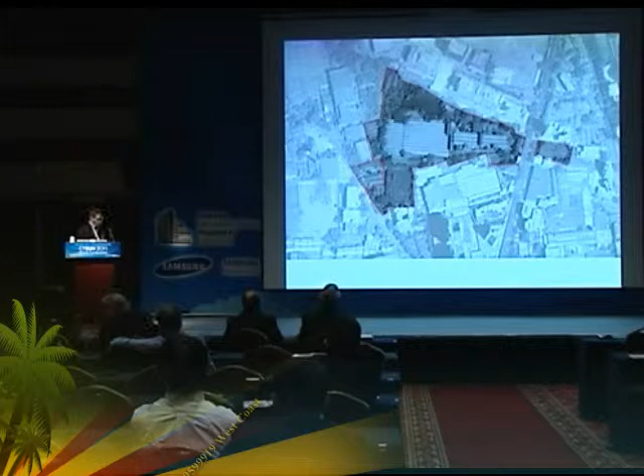And we talked with our client about how to approach this issue and essentially said, well, this is a very good location, but it's not a place. And with our interest of contributing to the life of the city and also utilizing the site quite efficiently and making the most real estate value for them, we actually made one very important move, which was to strike a road or a street or a boulevard

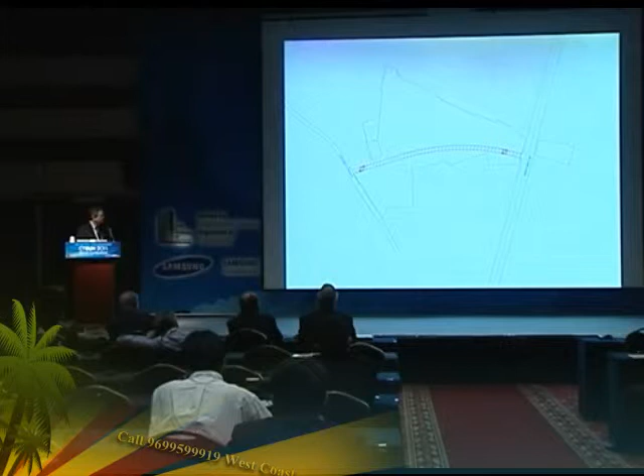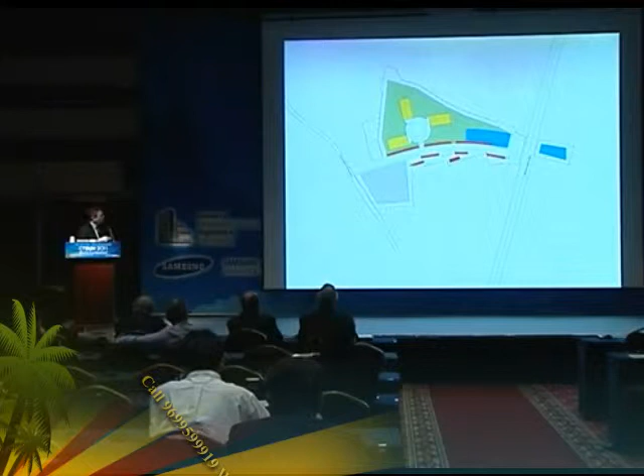across the site and to say that this is the place, this is the location, this is actually the identity of the place. What that also does is divide the site very cleanly and very effectively into a zone which can have public uses, parks, retail, street life, active street frontage, and still maintain quite a bit of space necessary for the actual mixed-use development itself.

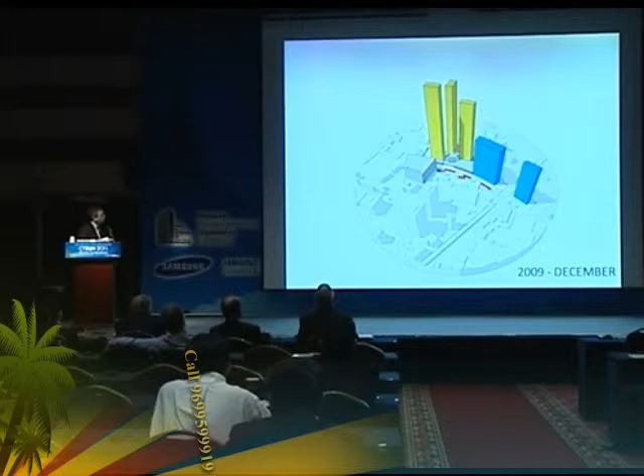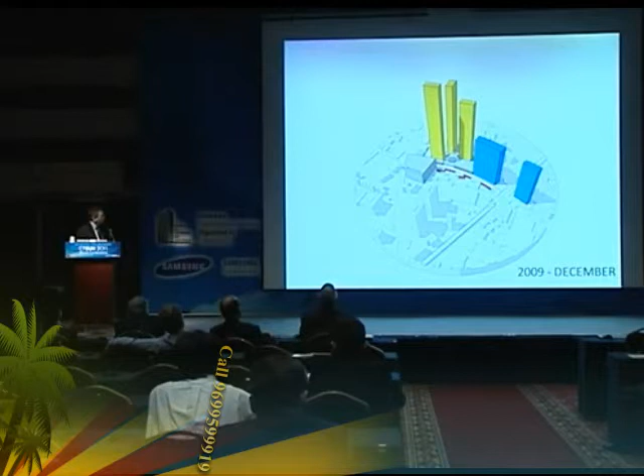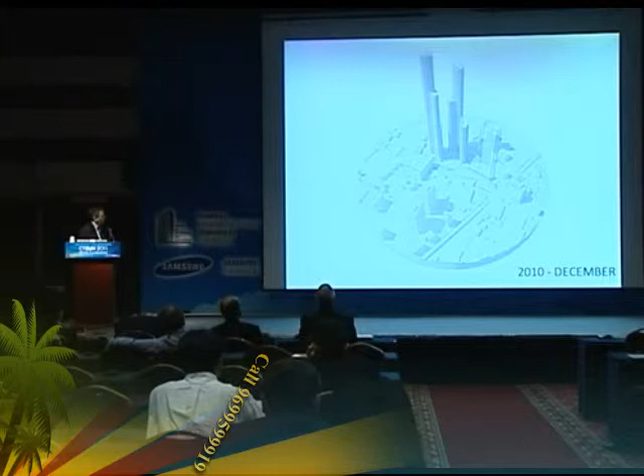And the master plan, as it sort of completed its initial stage, with the designation of 3 already quite tall residential buildings, a group in yellow, mixed-use buildings in blue, the red indicating retail and street uses, and the green indicating public park. Fast forward about a year of design into a variety of buildings, and we still have the beginning of the development of a street life which connects the whole complex to the city,

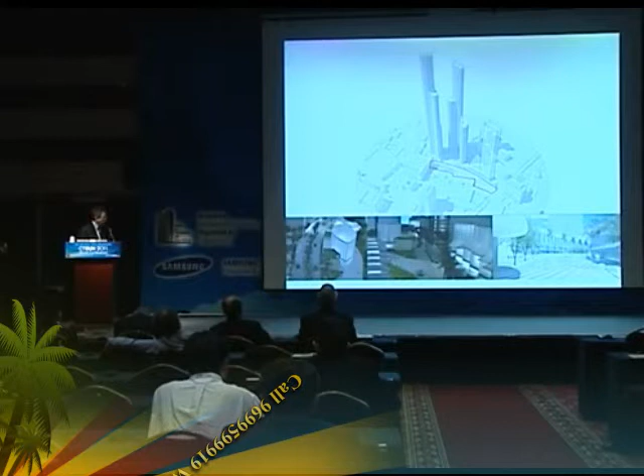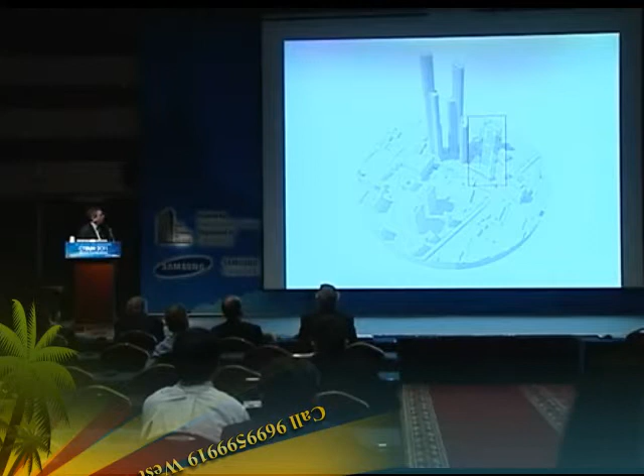a boutique office building about 250,000 square feet, a mixed-use tower which is currently in schematic design, and of course a group of residential buildings, residential towers, the tallest of which is World 1, which is primarily the subject of the presentation. But it's important from my point of view to go through how the site works and how, in particular, the density of the site required a response that couldn't start with the tall, iconic building that the client wanted to build. That had to relate to something.

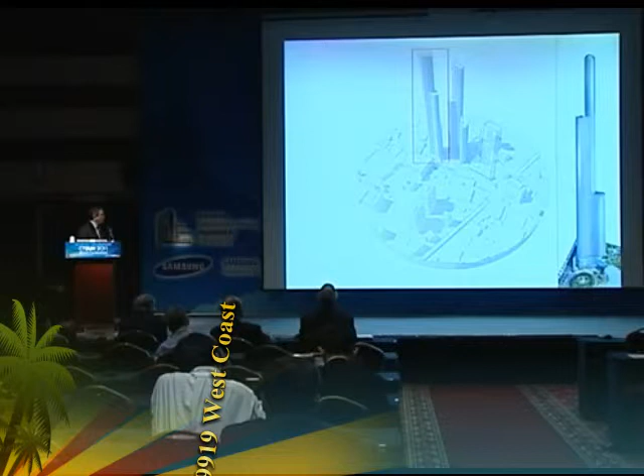So how did it get to be the way it looks, and what you're seeing in the three-dimensional image is more or less the final design which is under construction. And it's interesting, I think, in the context of Adrian Smith's comments this morning about his interest in the three-leg plan and the sort of lineage through architecture. We didn't start here. We didn't quite back into it, but it was more the confluence of a very dense site which needed to accommodate a whole lot of apartments in conjunction with structure and other kinds of considerations.

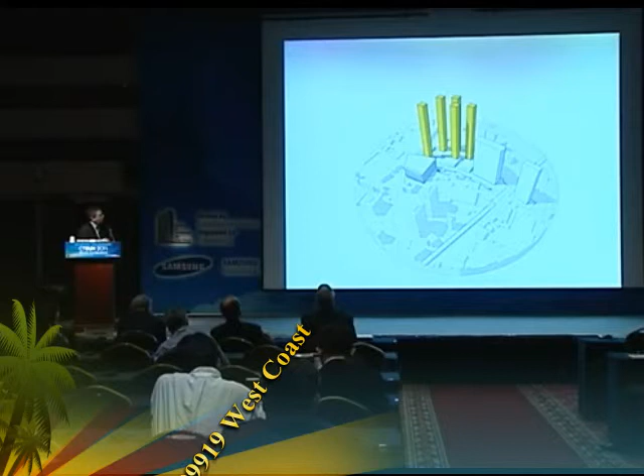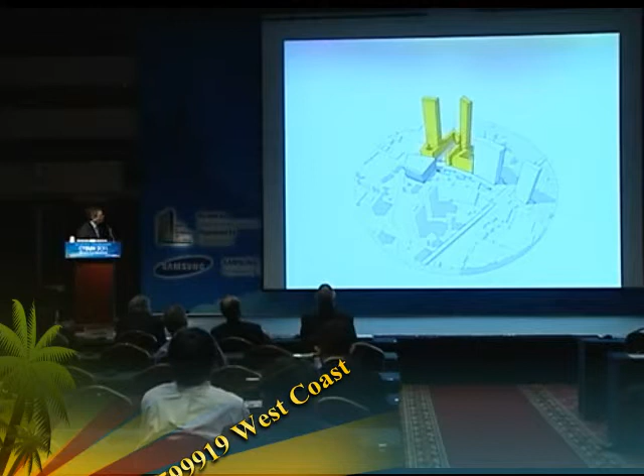Along the way to finding our way to that solution to the residential development in these towers, of course, we looked at different typologies, a typical 90-foot square point tower. We looked at mid-rise, which really wasn't so mid-rise because of the sheer amount of housing that was trying to be put on the site. We looked at mixtures of high and mid-rise, but essentially came back to the answer I think we always knew, which would be that this would be a group of tall towers. Already at this point, also indicating that there was one special and dominant tower among the family of three.

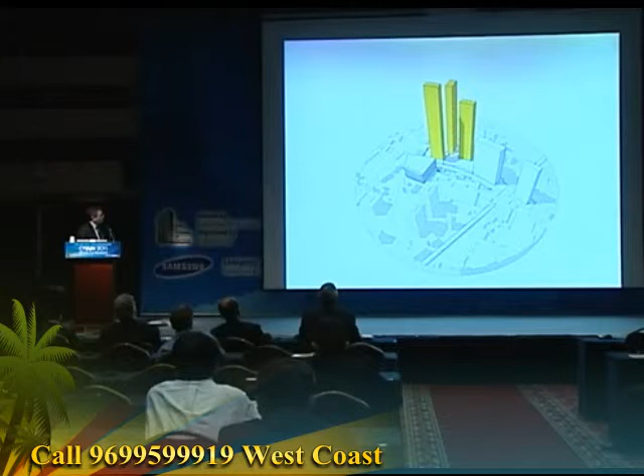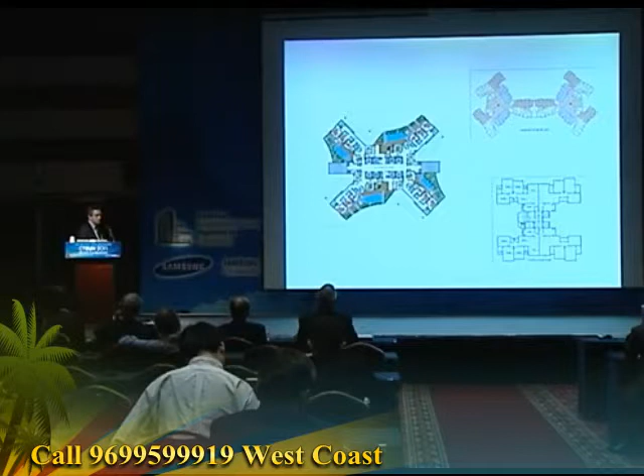Now, to take this diagram, which is a bit generic, and turn it into what it needed to be in the context of Mumbai, we spent a good deal of time looking at some local precedents. These are floor plans from a variety of typical high-rise buildings in Mumbai from the early to mid-2000s, from which we drew a few early conclusions. One was that almost all these buildings were the logical maximum extrusion of lower building typologies. Single groups of elevator banks, no high-rise and low-rise, building aspect ratios, in this one in particular, which couldn't really be extruded any further.

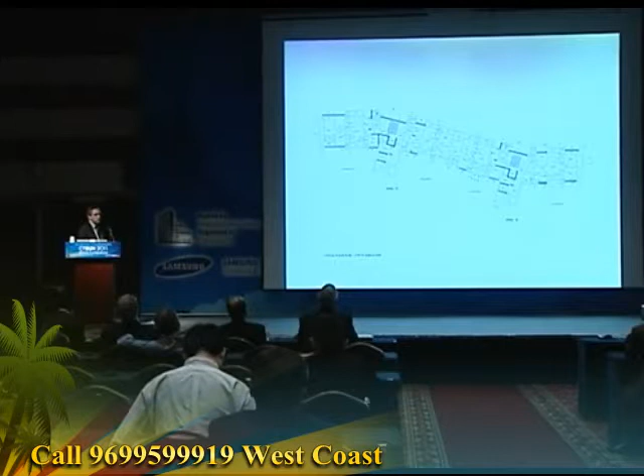We also found, by and large, and this is not a surprise in terms of buildings that are 100% residential usage, that the buildings are designed almost entirely from the inside out. And so there were a lot of aspects of this, knowing the density and the height that we were going to achieve, but also the aspirations of building an iconic building on part of our client, that we knew could not apply to what we were doing.

And so we had to begin to make a sort of new typology within this context, which certainly wouldn't be the kind of typology you would find somewhere else in the world, but also wasn't what you already found here in Mumbai. But at the same time as we knew that we had to make improvements, we also knew that this inside-out design approach and our clients and their competition's very clear sense of the residential market meant that we had to look at these quite closely, and that we had to find a number of ways of achieving things that are actually quite desirable about these buildings.

Many of them have floor-through units. Many of them have extensive balconies. They're actually, in many cases, quite large units. And so we took these typologies and began to make our own sort of prototype. Generic in terms of what it predicted as architecture, but embodying a number of aspects that we thought would have to carry all the way through.

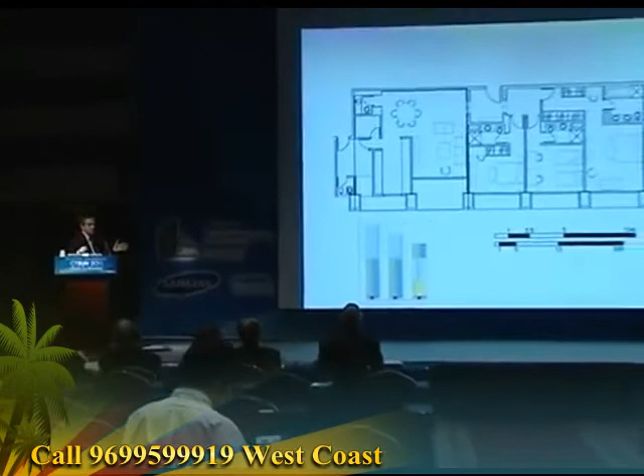The size of the apartment is extremely important. There was a very small range in which the apartments could be judged to be marketable, meaning they had to be at just the right size, just big enough, but not too big to fit certain area ranges.

The buildings that we looked at as precedents almost entirely had bathrooms that were at the exterior, which is fairly typical in Mumbai. Because of the density on the site, we knew we couldn't waste space on the outside, and so we made an early decision that they would be interior, which is not a huge breakthrough, but it is different from what was the norm. These are high-end apartments, and our client wanted balconies in every single room.

Relationships between family and public space, servant space, service, all had to be respected. In most of the super tall buildings we look at, we find a mixture of uses, and that's the way in which shape and appearance begins to be changed from bottom to top. In this case, we had very discrete building elements, and we also had a circumstance in which a taut curtain wall, for instance, was not going to be the solution.

We also knew, and this is sort of the key that started us into actually finding a suitable building form, that these diagrams at the bottom are actually Excel charts, and the pro forma was such that when we started to deploy this on the site, it became clear rather quickly that we needed 6 units per floor at the bottom of at least 2 of these 3 buildings. And so, knowing the size of the units and that we needed 6 of them, we knew we needed 21 bedrooms, 6 living rooms, 6 kitchens and service areas per floor.

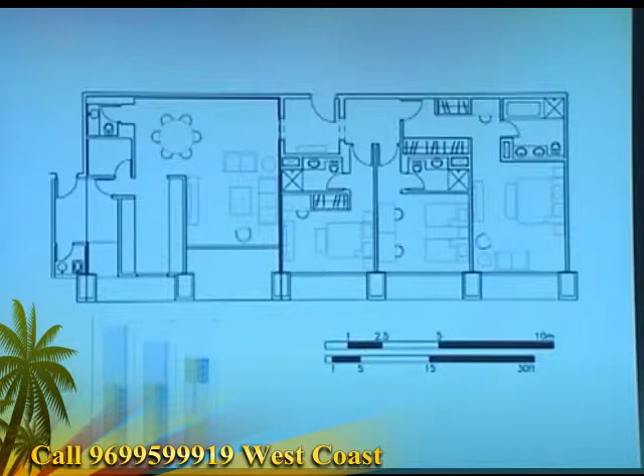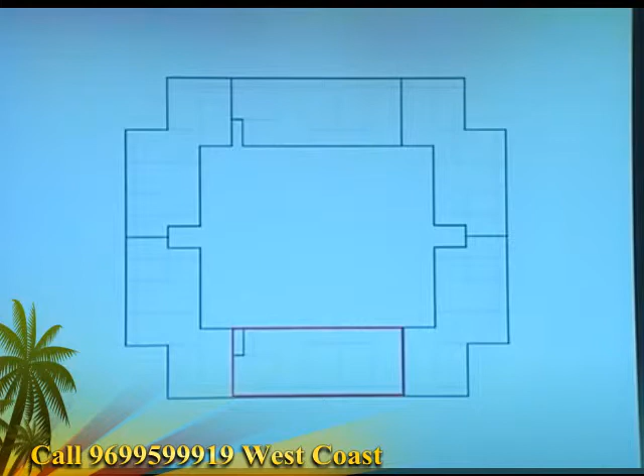And we started to do a kind of calculus where we take that prototype unit in red, start to imagine how cores might work, and they didn't want more than 2 apartments entered from 1 set of elevators, an additional complication. We started to do a kind of calculus of, well, if we need that much perimeter and we have to figure out a logical core, what are we going to do? And of course, that's how, between site and program, we ended up with our 3-leg plan, with an idea that structurally this would also have advantages as we moved forward.

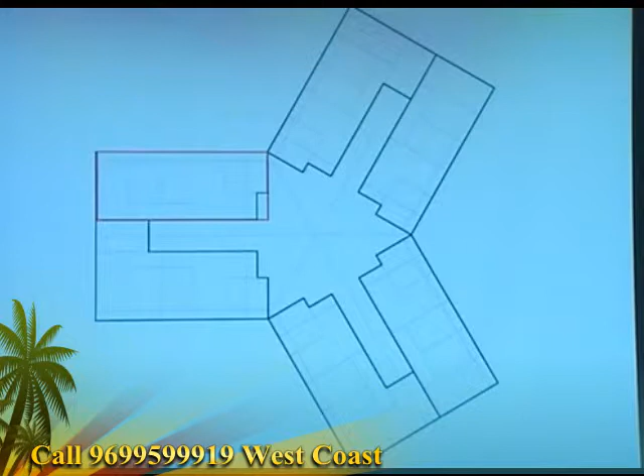And so you can see as we begin to take that diagram and start to put the shape in it that you saw in the building itself. And so we had a scheme, let's say, at least for the plan of the building and the basic volumetrics of the building, but we didn't have a structural scheme yet.

We made the early proposition architecturally that a cage of closely spaced columns at the perimeter with proper connections to the interior was a likely approach to deal with lateral forces and to be consistent with what we needed to do in terms of residential plans. And of course, the strength of concrete normally used in a place like Mumbai isn't particularly high, and those columns at the bottom of the building were quite big.

We looked at embedding steel in the columns, which had a very marginal reduction in the size of the columns, and fairly quickly rejected that as an approach for its complexity in construction.

But during this time, we also had essentially quite refined the actual unit plans, to a degree that we were quite happy with them, and our client was happy with them, in terms of all bedrooms essentially having full-length windows and balconies at their edges, and the sort of payoff of a shape like this, which was that the living rooms and dining areas were at the perimeter.

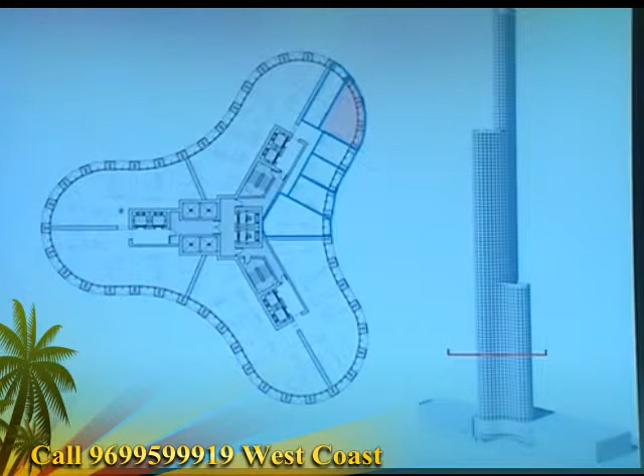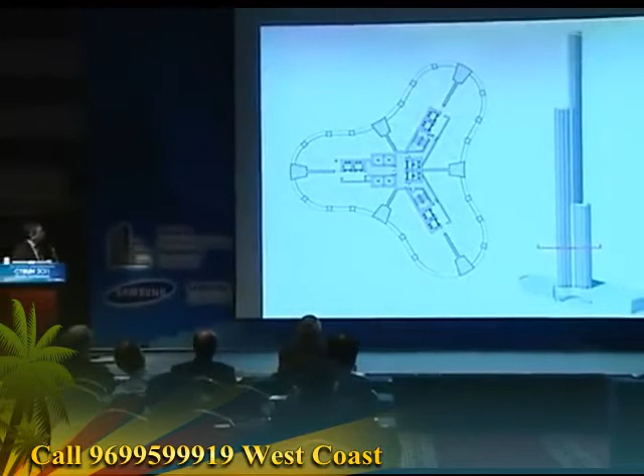Now, of course, none of us liked the 2 giant columns that were in that living room, and so to this point, we told our structural engineer that they were being too polite and too cautious with us and sort of taking our lead. And I said, you know, forget everything you know about this except the shape of the building and the volumetrics, and what would the perfect structure be.

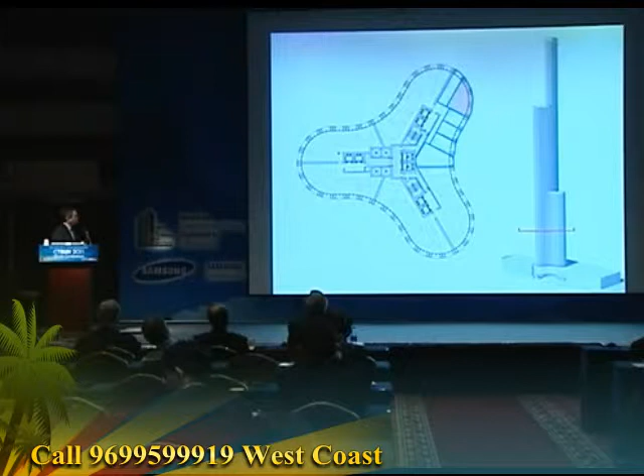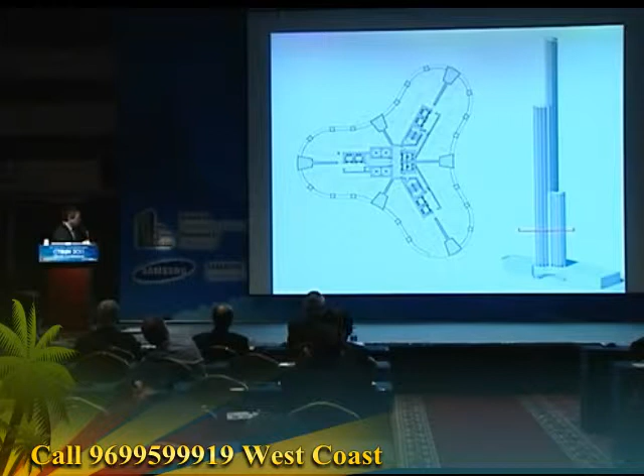And we sort of had a sense of what the answer might be, and of course it was 6 mega columns, and Bill can describe this better than I can, 6 mega columns connected to the core in a strategic fashion. But of course, given the calculus that I talked about before in terms of needing a certain amount of perimeter, this was effectively taking 6 bedrooms out of the mix, and so the building didn't work anymore.

And we played with that further, for instance, to say, well, maybe we could configure it a little bit differently. But those are still actually quite large, and we were losing floor area in a place where we couldn't afford to lose floor area relative to residential plans. And so, given these and what we were working with, and you've also seen this evolving in 3 dimensions as I've shown the plan, we started talking about a hybrid system and what the possibilities would be.

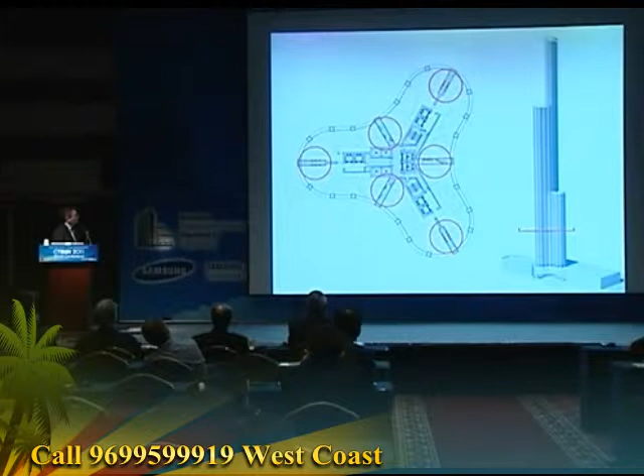And of course, I should have said that, done that slide. I'll go past that.

So what we ended up with as an approach that works very well for structure and very well for the apartments is actually a sort of hybrid megastructure in which we gathered 6 columns in the concave surfaces and gathered 3 in the convex surfaces, and we're able to open this area up with a single small gravity column which gets taken out at each tier.

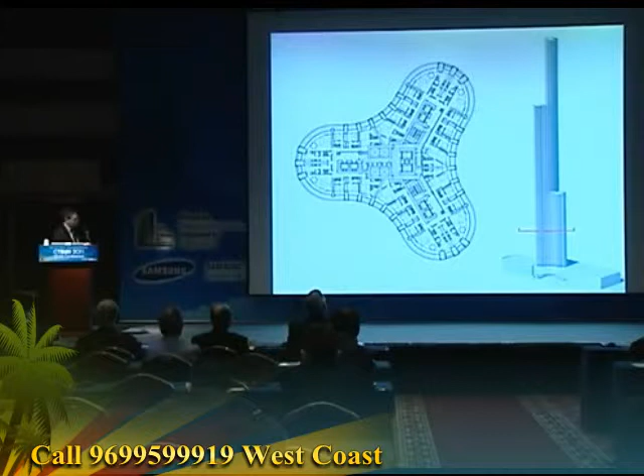The result of that visually for us was quite exciting and quite important, in that the gathering of the columns, 6 columns in the concave, leaves one column, the single visual element, which goes from top to bottom in each tier at the inflection point.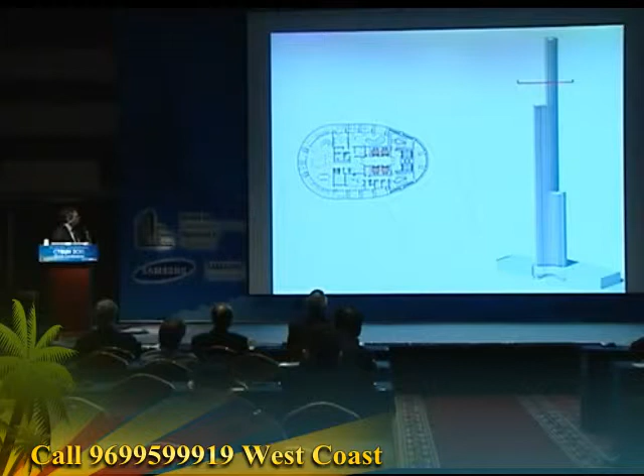Tier 2 plan working with the hybrid structure, and Tier 3 in which there are duplex apartments occupying the entire floor plate. And some images of the building where you can see the effect of the gathered columns, the stretch, and the columns at the end. In a way, they energize and enliven the form in a way that our initial ideas couldn't do. A few more images quickly.

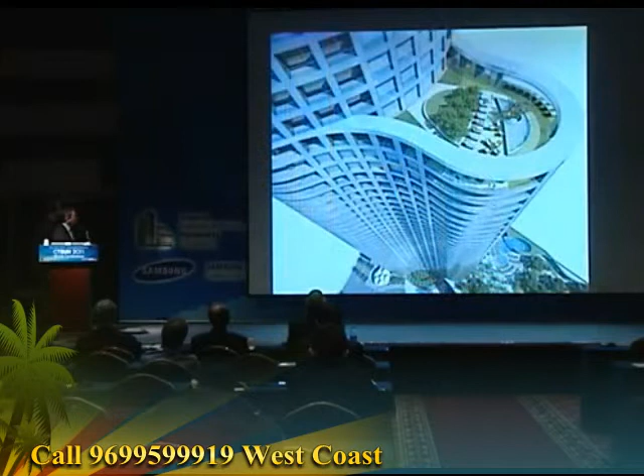And several views inside and out showing how the living rooms and bedrooms work relative to structure. At the living rooms in the lowest tier, the second tier with larger apartments and a living dining area with a panoramic view, and then at the very top of the building there are, I think, a dozen of these duplex units where the payoff of the structural configuration is especially welcome. And on the skyline, and now for real substance.

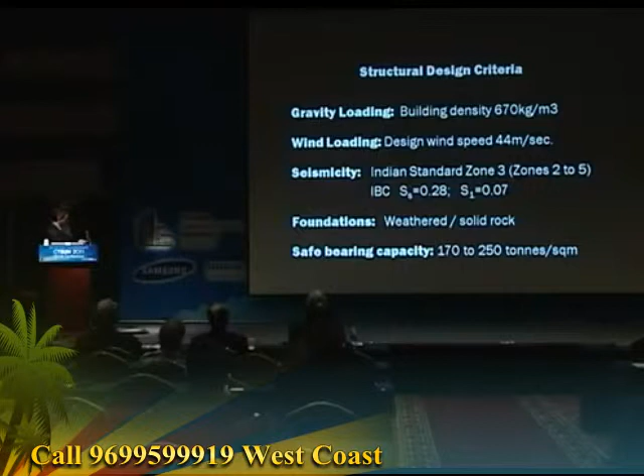I don't know, I thought that was a lot of substance.

Well, Jay has made the premise to you that together we've created a building that works well from an architectural perspective, from a structural perspective, and is well integrated. I think in the last slides he showed you, in some sense the architecture speaks for itself, of course, but let's look and see how well we did.

So this is just some basic data that particularly the structural engineers out there can sink your teeth into. The first line basically tells you that in Mumbai, for a variety of reasons, buildings are quite heavy. So you have a really dense, heavy building to start with. Wind loads are pretty comparable to here, maybe a little windier than here in Seoul; New York, very comparable. I would say that the speeds that are listed are, by some opinions, conservative.

Seismicity is moderate. It's in the middle of the range of the Indian spectrum. And in IBC terms, for those of you who would speak that, you have some data there in terms of IBC. It's more or less, again, comparable to New York, I would say.

In terms of foundations, Mumbai is a mixed bag. It's former islands filled in, so depending on where you are, you have different conditions. But generally, if you go deep enough, you hit really good rock. So we had a combination of weathered rock and then solid rock down maybe 30 meters.

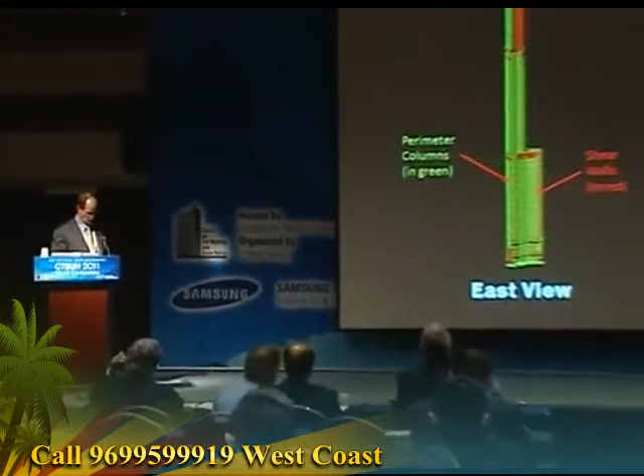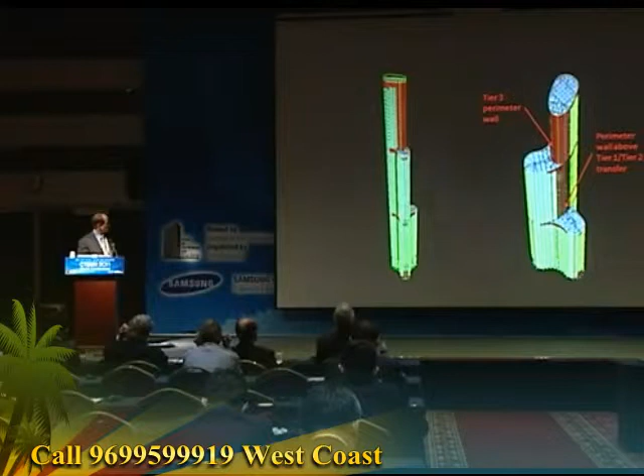In terms of the structural system, some of the images Jay showed you give you a pretty good idea. Here's a few more. Obviously, the grouped perimeter columns. You see some shear walls, which are sort of along the splines, like some of the other buildings you've seen today. Additionally, there are some walls on the perimeter that overlie where the one tier sets back below, on the tier below. Not as well organized as some other buildings, but still a system that allows us to deal with the stresses that occur at those intersections.

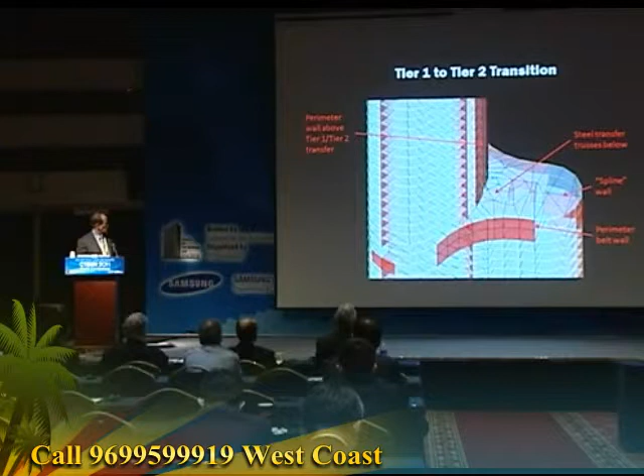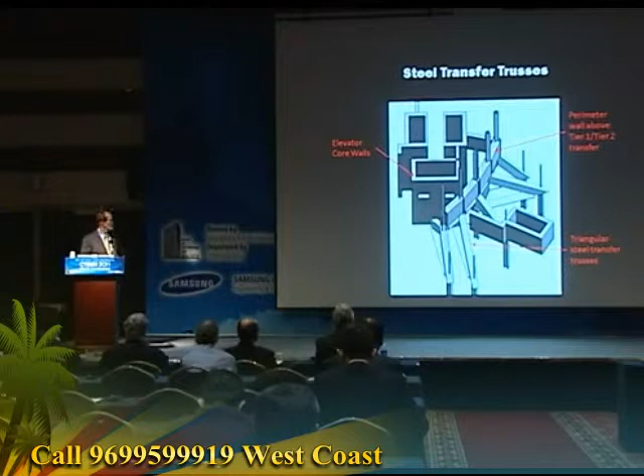Here's the more difficult one, the Tier 2 sitting on Tier 1, and we'll just go inside a little bit because the wall that goes across the top of Tier 1 is transferred out by a series of simple 3-piece trusses, steel trusses. We try to use as little steel as possible in the Mumbai market. It's seen as a significant premium as well as something that the local contractors at least do not have a lot of good experience with.

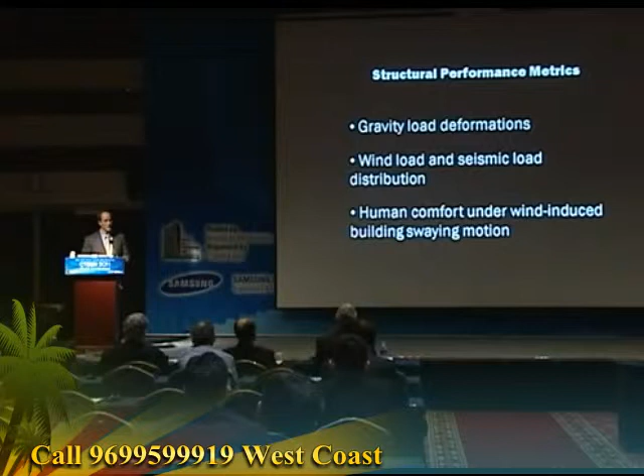In terms of the metrics for how we did, I thought these were some of the more important ones. In a tall building, as others have said today, obviously keeping the differential shortening of the individual columns and walls to a minimum is an important consideration, dealing, of course, with the wind and seismic loads, and then achieving the requisite level of human comfort in the wind.

In terms of the dead load distribution, you can probably see from this chart that the bubbles represent the general magnitude of the load at different places in the footprint. This is at the foundation level. Obviously, you have 3 tiers, which are at different heights, so much greater loads. But hopefully you can see from this diagram that the distribution is relatively even. Obviously one side is more heavily loaded than the other, but the distribution of the load is pretty good. If I just back up a second, if I can figure out how to do that. In terms of the magnitude of the load, the most heavily loaded column under gravity is 136,000 kilonewtons. It will be a reference point for these other slides.

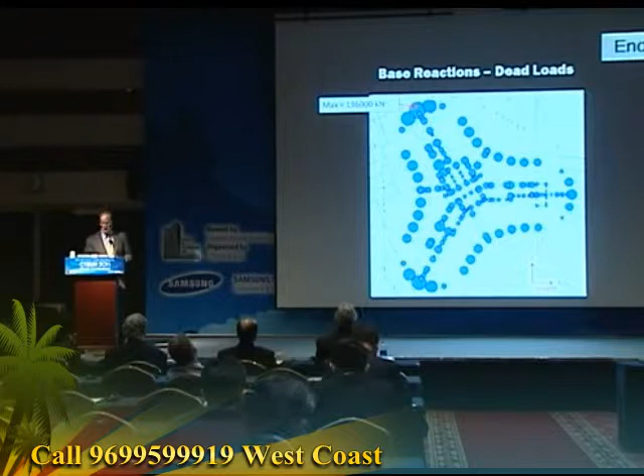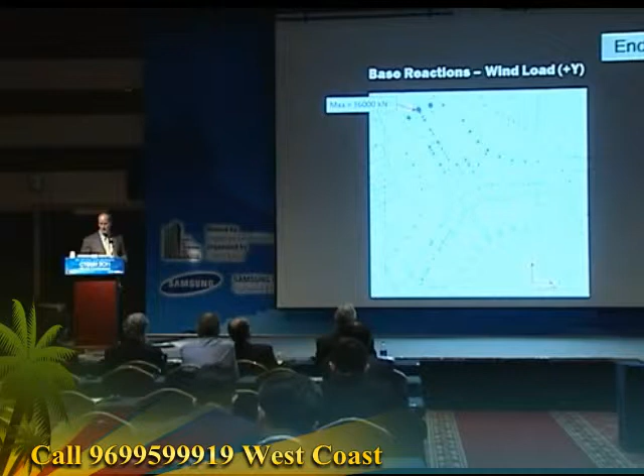Now, if we look at the wind, you see a pattern which represents that the whole of the building is acting together. You see the peak stresses, the blue, the largest compressive stress due to wind, and the white circles, the largest tensile stresses due to wind alone, are at the perimeter, and there's again a relatively gradual distribution between the perimeter and the middle and to the other side. The magnitude of the wind load is now 36,000 compared to the 136,000 you saw on the prior slide. So the wind loads are large, but there's no tension at the bottom of the building. Same thing, different wind direction, same sort of conclusions.

In terms of seismic, another point of reference in terms of the numbers, 24,000 kilonewtons. So as with some of the other buildings shown here, in a moderate seismic zone, the wind load is basically double the seismic excitation.

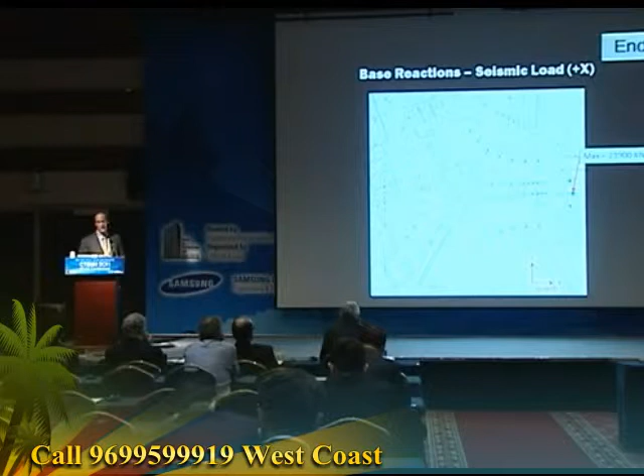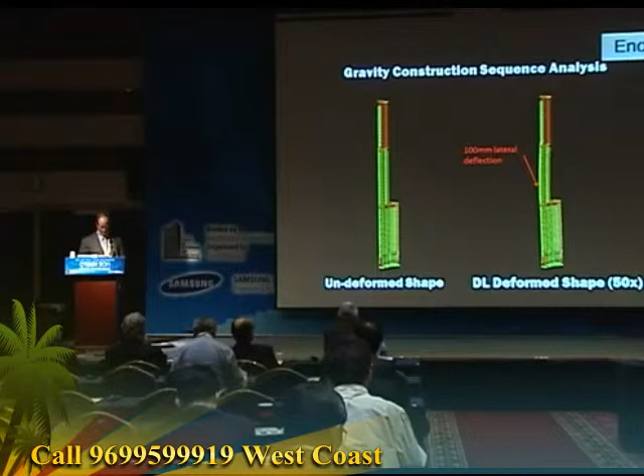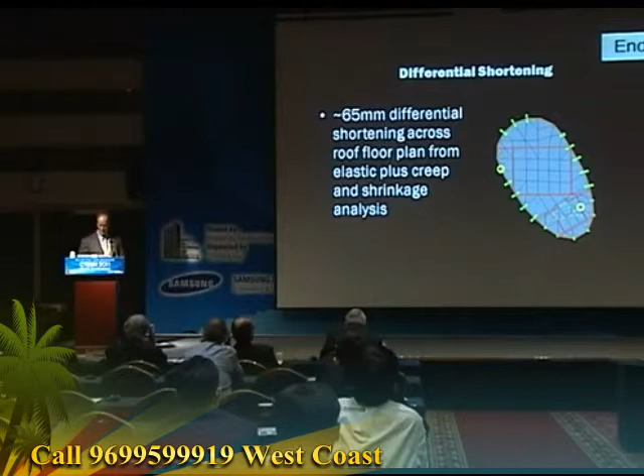In terms of the deformations of the building under its own weight, these are the results of a construction sequence analysis where, as is typical, you generally get the largest degree of lean associated with differential effects more or less partway up the building. 100 millimeters is not a bad value in my opinion. In terms of differential shortening between individual columns, if you go to the roof and look at the relative values, the greatest difference is between the 2 points circled, which are a significant distance apart, and the differential, including all long-term effects, is 65 millimeters. So again, I think a quite acceptable result.

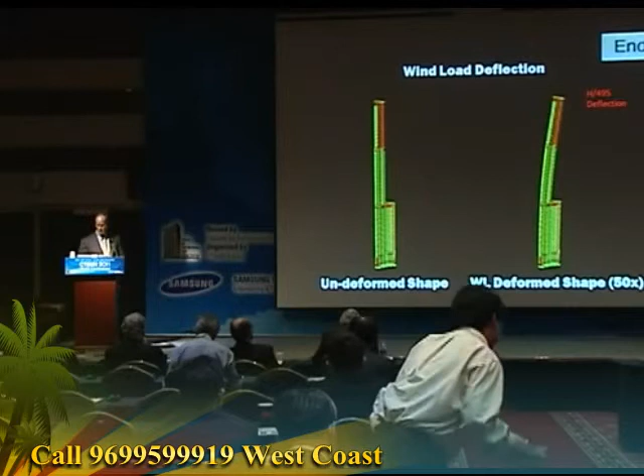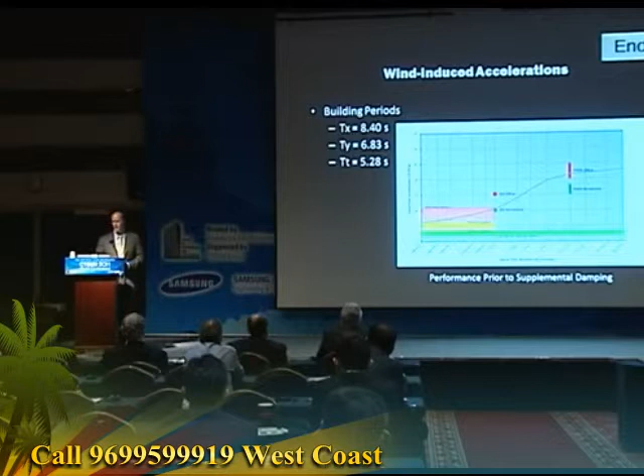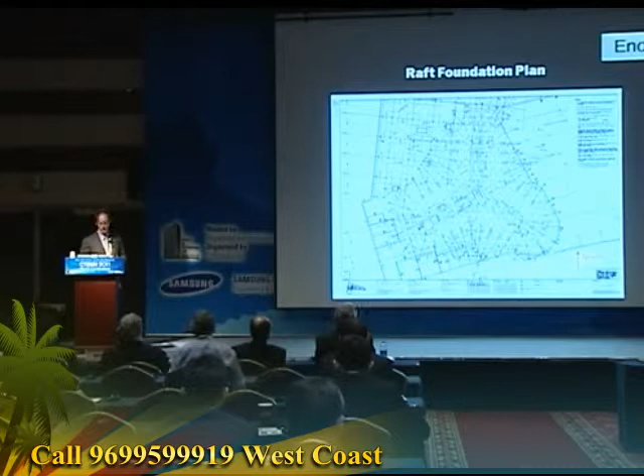2 minutes. In terms of where we are in the construction, we're at the foundation level today. This is the foundation plan, so we are pile supported, but rather short piles. This is a relatively recent photograph of the piles in place, and coming up more or less to today. The raft is in progress. Some of the raft at this point is cast. This is not completely current.

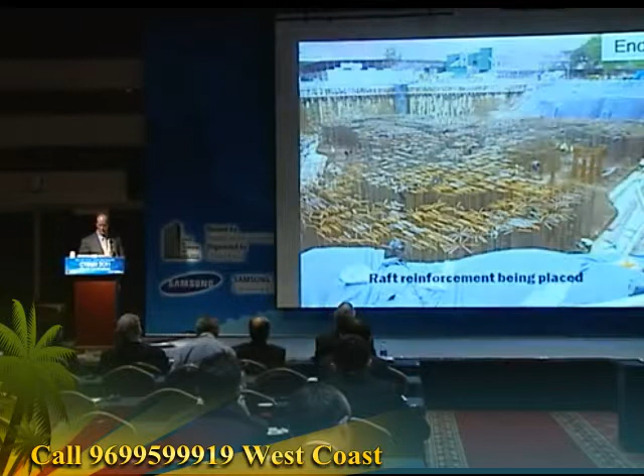And that's where we are. So maybe in a couple of years, if you invite us back, we'll tell you how the story ends.